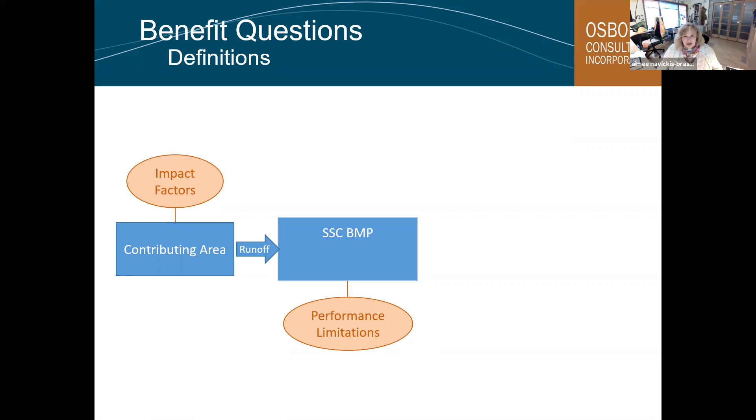With that, we also looked at performance limitations. We're really trying to understand the variables that can influence SSC performance with the impact factors and the performance limitations. Performance limitations are features of the SSC itself that can influence the performance, such as the type of BMP that's selected, the sizing criteria, the infiltration rate, and the media thickness, for example.

Another important variable was both the flow control and treatment mechanisms that the SSC provides. An example of a flow control mechanism would be some type of control structure regulating the discharge of flow from the BMP. Another example would be a treatment mechanism with sorptive capacity to help remove dissolved metals. So what are those mechanisms that can be expected with the SSC BMP?

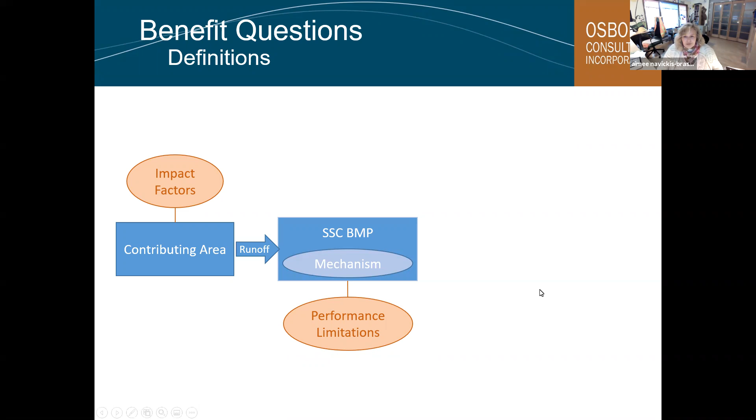Then we start looking at the benefits. We considered these variables that can influence the benefit. What are those benefits you might expect to see? The two we looked at that are stormwater related in the permit are the hydrology benefit and the water quality benefit, where the hydrology benefit related to the SSC is the effectiveness of the SSC for reducing flows.

The other thing we also looked at was other environmental benefits. These are not items that are in the permit, but some other benefit that the SSC could be providing that could improve conditions within the watershed area. Some examples of those would be groundwater recharge, and air quality improvement is another one.

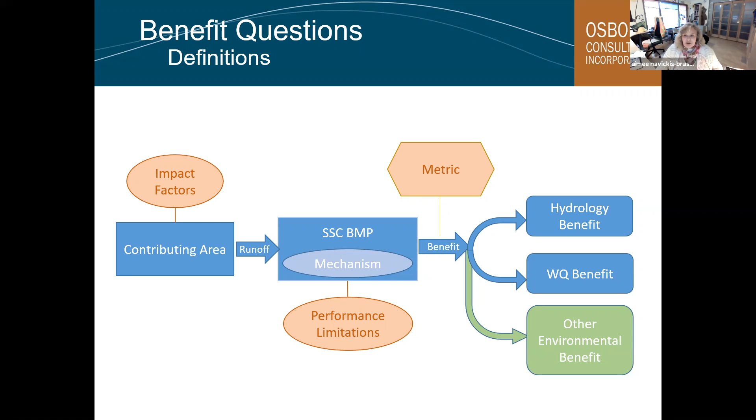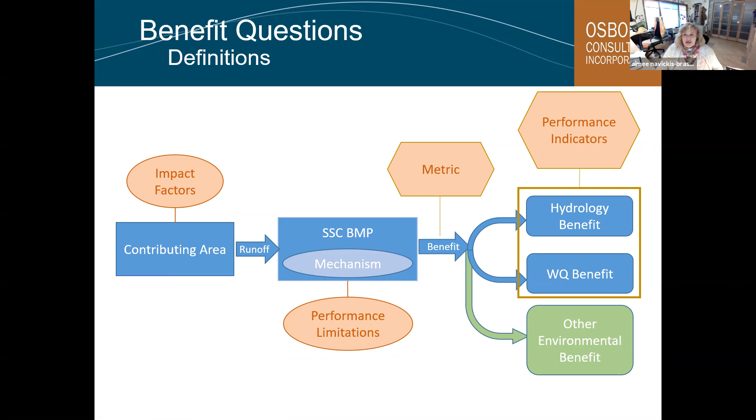And with that, we also were looking at the metrics. What are metrics that are used both in Washington state as well as nationally to measure this benefit? A percent reduction is an example of a metric that could be used. We also defined the performance indicators related to the SSC, focused on the hydrology benefit and the water quality benefit, and how effective the SSC is for reducing pollutants or whatever metric is selected. It's important to note that we define the point of measurement for the performance indicators as the discharge point of the SSC in general.

Our approach for doing this work included a lot of literature review. We reviewed the Phase I annual reports to understand what types of SSC projects have been done in the past. We wanted to make sure we were focusing our literature search on ones most relevant to the permittees, indicated by ones that are maybe used more commonly. We also had interviews with the permittees and asked them about ones they might anticipate using in the future to help us narrow that focus. We met with Ecology again to really go through and understand the permit, and the reasoning for the permit language currently.

We reviewed a lot of journal articles as well. Some were single studies where the whole paper was about one study, and some were a synthesis of many studies. We gave priority to peer-reviewed studies because those tend to have higher data quality. We also reviewed government reports and documents, which are reports on a government website or government agency's website. These are usually peer-reviewed as well, although it's not always as clear depending on where you find the document. We also pulled data from the International BMP database and NSQD to help with synthesizing all of this information.

Prior to starting the work, we defined an approach for the literature search. We wanted to have comparable data so that when we were going through this, we were comparing apples to apples. So we laid out a plan.

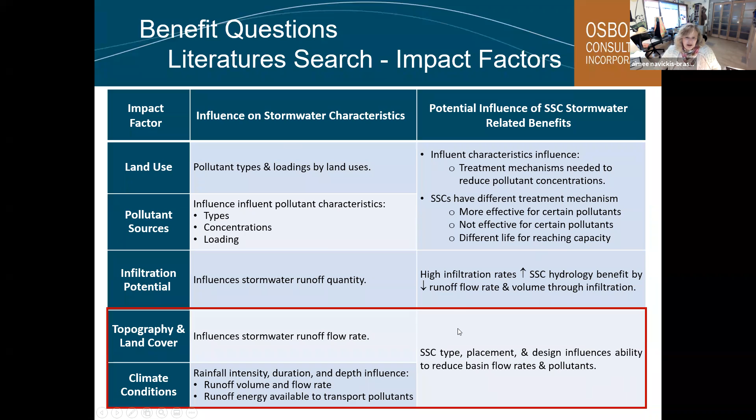So this can affect the SSC type, placement, and design, will influence the ability to reduce the basin flow rates and pollutants there. So this is just more of a qualitative consideration, especially as we start thinking about those application pieces for the SSCs.

Okay, so as part of our approach for the literature search, we looked at TAPE protocol. I want to explain why this is really important when we're thinking about comparing data between studies. So this is from the International BMP Database.

It's just looking at dissolved metal. On the y-axis, I have the frequency that a specific reduction occurred. 0% means there were no reductions in that category, and 100% means all of the data had that reduction. So you can see, looking at all data here, there's about 5% that actually had an increase in dissolved zinc coming out of the BMP.

Then you've got about 30% that had no change. You had about 15% that had less than 20% reduction. You had about 10% that had a reduction of 20 to 40%. And then about 10% that had 40 to 60%. And then about 20% that had 60 to 80% reduction. And then the last 15% was greater than 80%.

So these were all treatment BMPs that would fall in SSC type 2 for new treatment BMPs that we looked at. And we looked at all of them. We didn't filter anything out.

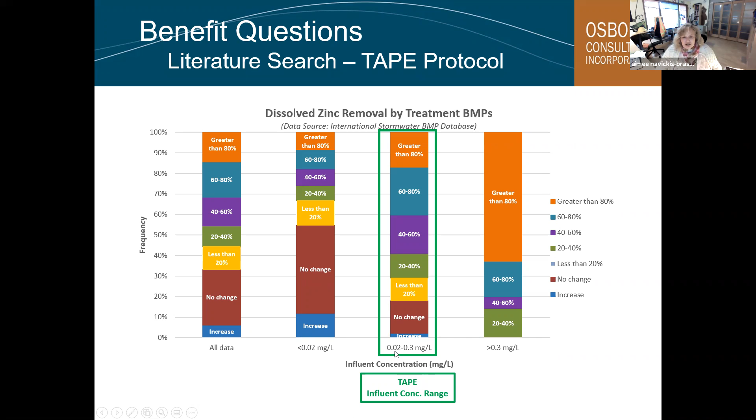Then what we did is we broke the data up and we looked at 3 different groupings. We looked at the TAPE influent concentration range first. TAPE defines the influent concentration from 0.02 to 0.3 milligrams per liter. It limits the influent concentration to that range. We also looked at concentrations that are higher than 0.3 to see how the pollutant reduction compared. And we also looked at studies where the influent concentration was less than TAPE.

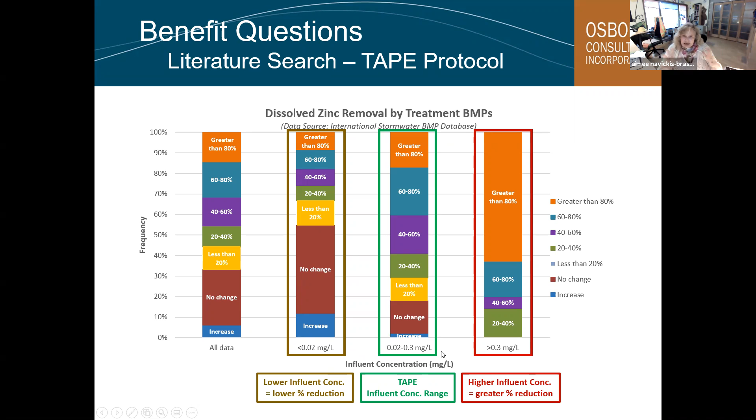So we were hoping to find studies that were done with influent concentrations closer to the TAPE range. That was very difficult to do. We ended up going into the International BMP Database and just limiting the studies down to focus more on the influent concentrations in that range.

2 studies done in New Hampshire looked at 2 different depths of media. It had a different media composition as well. They looked at the nitrates that were reduced, and they actually got a 44% reduction and a 43% reduction. They didn't report any leaching from these studies. These are very different results. These are also not comparable BMPs because it's a completely different media, completely different depth. I'm not surprised to see these differences here.

We know that the Washington media leaches nutrients. The other one appears not to. The different depths are also important. The deeper your media depth, typically, the more likely you'll see nitrogen cycling, which is often the dominant mechanism for reducing nitrates. So we also noted that some studies don't include leaching at all.

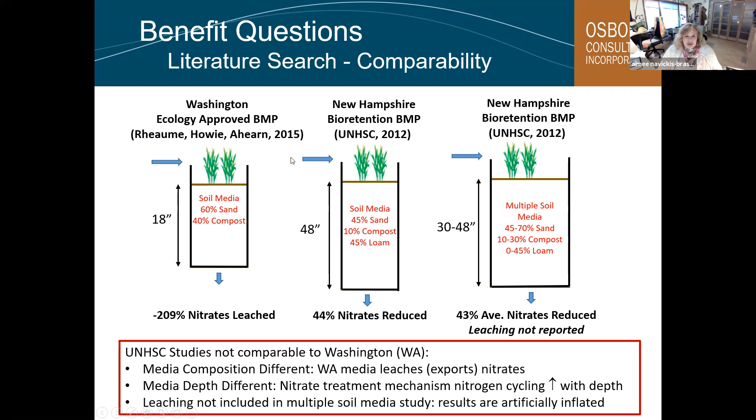They don't mention that. We do, in Washington, note when we see pollutant leaching out, but I did see some that were just not noting it. So when you don't include that data, it artificially raises the percent reduction. So anyway, these are the reasons we outlined having this consistent approach at the very beginning of the study, but the literature just didn't exist for us to be able to follow the plan and collect data for the study. So let me show you what we found in the study.

So in the first column here, I have the SSC project activity type, numbered all 11 of them. And then I have our different performance indicators. We have hydrology that we used, as well as water quality. Again, this is the effectiveness of the SSC for reducing flows or reducing pollutants. We looked at all of the targeted pollutants that are in the NPDES MS4 permit. We looked at the performance indicators for those for each SSC.

We also looked at the TMDLs listed in the Western Washington permits to see if there was data available to indicate how these SSCs would perform for those different parameters. NA means it just didn't apply to that study. For example, for new flow control facilities, we weren't looking for anything in the NPDES permit, because it's not approved to provide any reduction of a pollutant, so we didn't look for that. The same with new runoff treatment BMPs, not approved to provide flow control reductions, so we didn't have that either. We had a handful of items we didn't look up at all because they're not approved to be used for that.

At the very beginning of the study with the TAC, we talked about the SSCs also in the stormwater manuals, like flow control facilities, runoff treatment facilities, and LID, and decided that instead of going through the literature for performance of SSCs for regulated parameters, we would use the performance standard for runoff treatment and flow control that's in the manual. So those are the parameters and data we used for that.

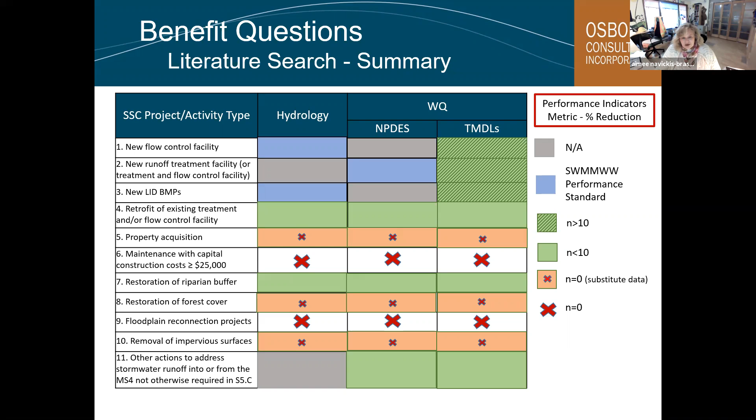We also had cases where we couldn't find information, but used substitute data. A good example is property acquisition and removal of impervious surfaces - we used data from open spaces and compared that to what we presume the property would be if it wasn't acquired, or not developed, or the impervious surface was not removed. And then there was just no data at all, like maintenance with capital construction costs greater than $25,000, or floodplain reconnection projects. There's some good data on floodplain reconnection, but it's mostly modeling work, not done with samples, and not measured at the discharge point of the SSC itself - it's measured in the water body.

After we got through all that information in the literature search, we developed matrices. I'll show you at the very end. It evolved as we went through the study.

Any data we collected, we synthesized using basic statistics. For some studies, especially the International BMP database, I went through and tried to limit it down to the parameters as close as I could, so it'd be more representative of what we'd see in Washington. We recorded the performance indicators - the metric we used was percent reduction. We also recorded when it was leaching, so in the table, if you see negative values, that's because that parameter was leaching from that SSC. We noticed a pretty wide range of data, because within the SSC categories, like new runoff treatment BMP, that includes many BMPs, not just one in particular, and when you start averaging it, you get interesting ranges of information. So we reported averages, minimum, and max values to show some of the differences in the data and sample size. I'll show you that at the very end.

We also documented environmental benefits if they were included in the study we were reviewing, and identified data gaps - there were a lot of them. So we identified the status of the research as it is now.

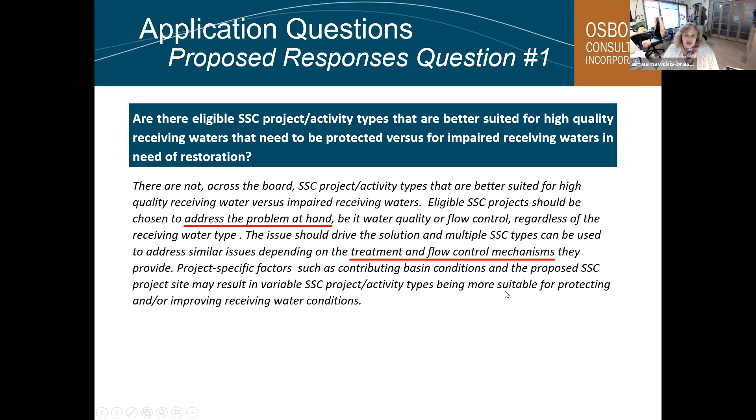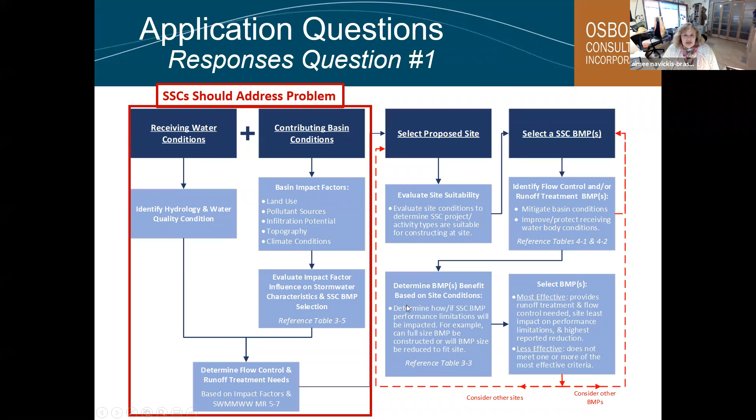So going back to our flow chart and looking at the left side, the SSC should address the problem. So those are the receiving water conditions or impairments, and the contributing basin conditions, those impact factors that can influence the SSC performance. And the other part is making sure that the SSC that's picked provides the mechanisms that are needed to address the problem at hand. That's getting to the core of that answer.

So for response to question 1A: within an SSC project activity type, are there more or less effective BMPs or combinations of BMPs for various land uses and receiving waters? Our response for that was there are typically multiple BMPs that fall within each SSC project activity type.

BMPs that are more or less effective is dependent on many variables, such as the contributing basin impact factors, the specific receiving water impairments identified for improvement, whether the selected BMP provides the type of hydrology, flow control mechanism, and or water quality treatment mechanism benefit needed, the project site suitability for locating the BMP, and other factors itself.

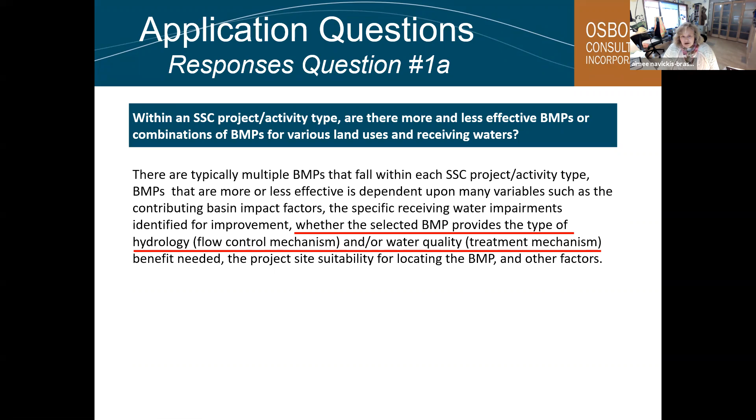So really highlighting in this one, the part that's important when we're talking about more or less effective, it's really going to be influenced by whether the selected BMP provides the flow control or water quality mechanism that's needed to target those parameters. And also the concept that not all BMPs or SSCs are created equally. They all have different functions.

So this is a table of more structural BMPs that fall into category or type 1, 2, and 3, which is new flow control, new runoff treatment, and LID BMPs themselves. On the far left, we just have the BMP categories, and the BMPs are broken up by that. We have the BMP name itself broken out from the SSC category. Then we note the different flow control and treatment mechanisms that are provided.

And you can see for flow control, some of them provide flow control, some don't. Some of them provide basic treatment, a couple don't. Some provide enhanced treatment or dissolved metals. Some provide both TSS, dissolved metals, and total phosphorus reduction. Not a lot provide oil. So they're all different. And a key part of that is when we're talking about more or less effective, a big part of that is understanding the problem at hand and making sure the SSC BMP that you pick matches.

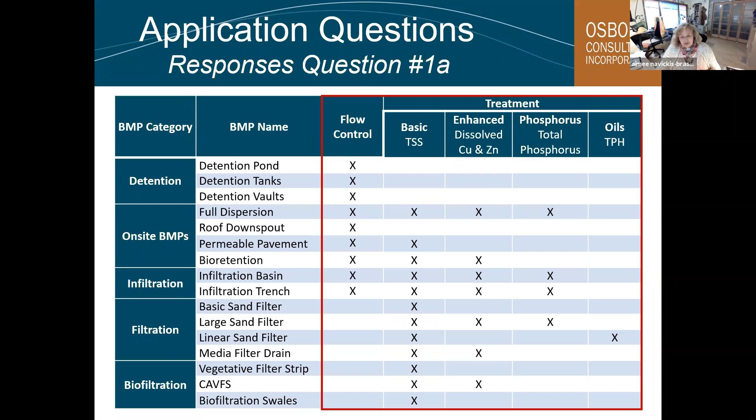Okay, so a longer question: what is the threshold below which implementation of a given SSC project activity type might not make a difference? So there are no readily definable thresholds below which implementation of a given SSC project activity type might not make a difference, based on the literature reviewed. There are probable thresholds of actions below which there would not be measurable or observable changes in downstream receiving waters.

So there are actions you would take, especially at the beginning of your retrofit process when not much has been retrofitted and many areas are unmanaged or inadequate—you won't see as much change there. But if you think about your retrofit in terms of the whole watershed area and reaching an ultimate goal, any action that removes pollutants or reduces flows, on any scale, will make a difference when combined with other related actions, even if it's not measurable in a stream using available methods.

So you may have a very large project going and not see a big difference when you try to measure it, but you have to think about the cumulative effects of the project, as well as the impacts from unmitigated projects in a watershed that resulted in cumulative degradation from multiple projects—effects that may not be related to any single action.

So you have to think about how you got where you're at, and also think forward to watershed improvements resulting from one or more incremental retrofits or restoration projects under a single plan. Therefore, the threshold size is related to the cumulative benefits of the total plan that can be anticipated to achieve an expected outcome. Existing watershed conditions can also influence that threshold.

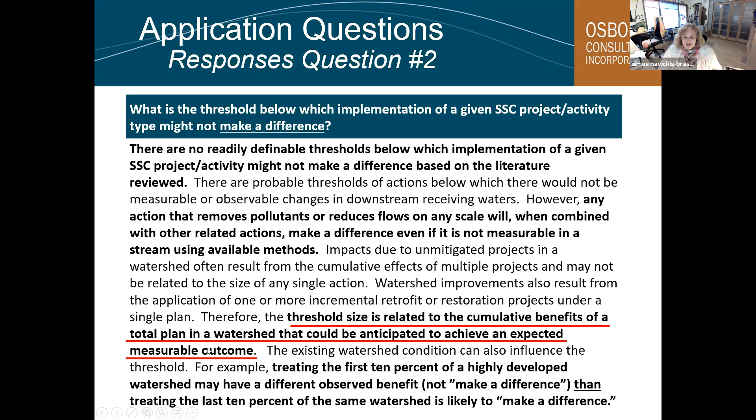So a couple of key points we'll highlight back on the flow chart relate to the threshold size, being related to the cumulative benefits of the total plan in the watershed that could be anticipated to achieve an expected measurable outcome. I'll combine these two, and then we go to the graph.

Okay. I can't, when you have these Zoom calls, I only have so many screens, so I can't see everything anymore.

So for question 2A, another question we were addressing, very much related to the last one, is how many are needed to achieve a benefit, and at what scale is modeling necessary to quantify benefits? There is no standard answer to how many are needed to achieve a benefit at a given scale.

As described in the response to the last question, watershed improvements can result from the application of one or more incremental retrofit or restoration projects under a single plan, or can occur over many years before being fully implemented. Also, the existing contributing basin size or condition may influence the threshold.

So a useful metric that could be used is the percent of progress made toward the watershed goal. If you're thinking about your watershed improvements as one big area, maybe the easier way is just percent progress towards your complete goal.

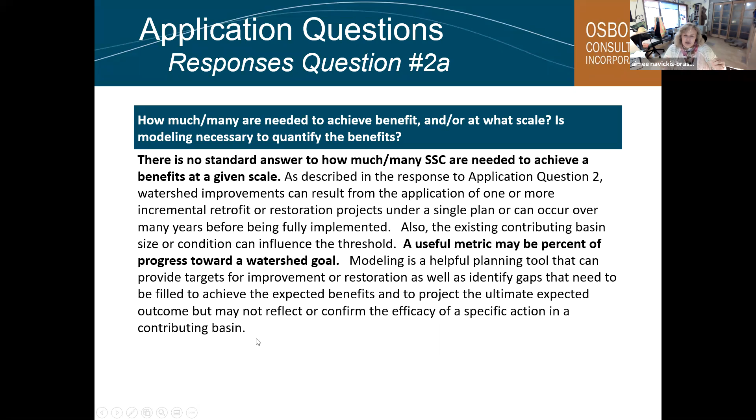So modeling, in response to the question about whether modeling is necessary—modeling is a helpful planning tool that can be used to target improvements or restoration, as well as identify gaps that need to be filled to achieve the expected benefits and project the ultimate expected outcome, but it may not reflect or confirm the efficacy of a specific action at contributing basins. This last part addresses the fact that as you begin this progress, you may not see that benefit because it usually takes many more projects and those cumulative impacts.

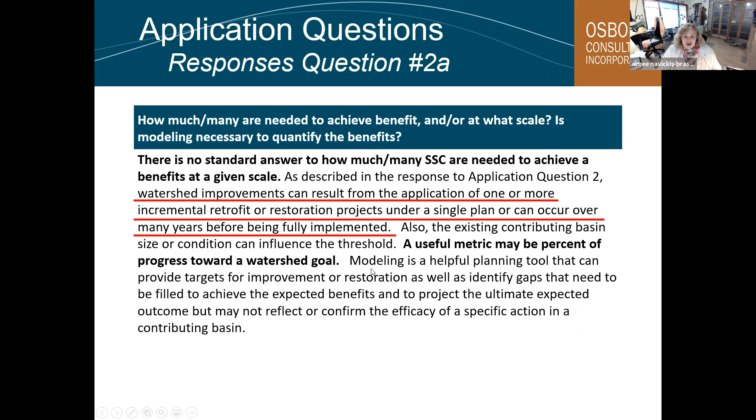So highlighting that watershed improvements can result from the application of one or more incremental retrofit or restoration projects under a single plan, over many years. Going back to our flow chart, thinking about those variables that can influence the benefit for the SSCs and influence the application—really for this one, it's thinking about the whole watershed, those cumulative actions done over many, many projects.

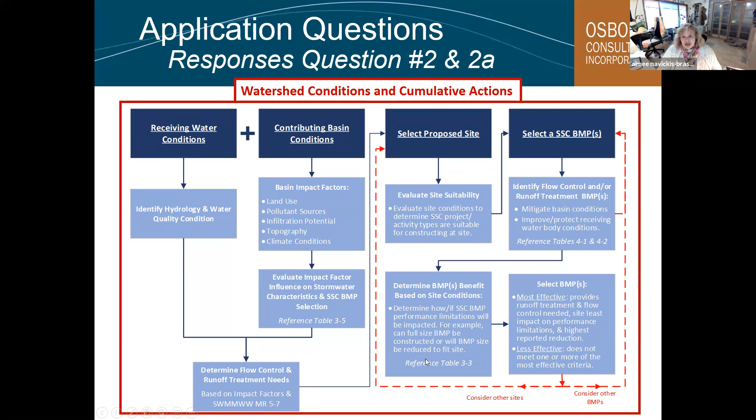Okay, two more. And then we go to the matrices.

So this is response to question 2B: how can the metric be scaled for retrofit projects that, due to project constraints, are not able to fully achieve the defined stormwater related environmental benefit?

In the literature reviewed, we did not find research that provided any basis to quantify a partial BMP or a partial SSC project activity type—meaning an SSC that doesn't meet the full design criteria to provide the full benefits, so it's been reduced from that full criteria.

However, there are common practices to scale metrics that are used. A lot of them assume a linear relationship between the portion of the SSC that meets the criteria and the portion of the benefit. A good example is the equivalent area determination. So if you've applied for a water quality grant, you've probably gone through that calculation before, or received a water quality grant for a retrofit project.

There's guidance in the Appendix 12 of the permit for Phase I for SSC 1 through 4. They use the equivalent area to measure benefit. It provides some type of framework to account for that partial benefit achieved by the SSC.

So there's nothing out there, so we made suggestions for how to move forward. The equivalent area approach could be expanded to scale other SSC metrics, such as infiltration for flow control projects, pollutant loading for water quality projects, or normalized cost for any project. For SSC types such as property acquisition, restoration of riparian buffer, forest cover, or removal of impervious surfaces, modeling is commonly used to estimate flow control benefits. Specifically, in relation to the metrics, the results from that could be used to scale the metric by determining the portion of the post-implemented SSC flow rates to the same SSC size to meet the full flow control standard from the Stormwater Management Manual for Western Washington.

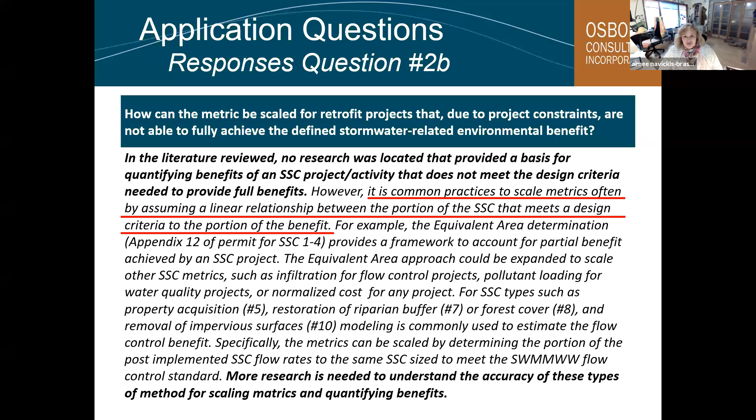Okay, so when we're thinking about scaling benefits in the scheme of these variables that influence the application, down here with the scaled metric, this partial benefit concept is on here to determine that benefit of the SSC, and it specifically talks about that partial BMP size and estimating what that benefit is based on sizing and if there's any other influence that could limit the SSC's performance. Understanding that information will help you understand the effectiveness of the SSC and be able to compare what's more or less effective between the SSCs.

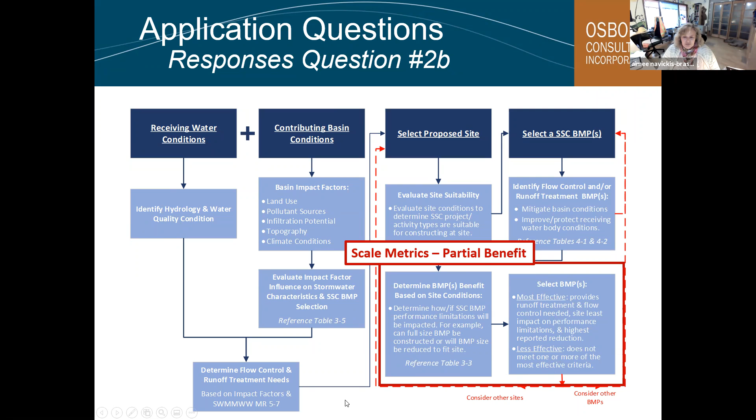Okay, last one. So what are other limitations, considerations for the most beneficial application of specific SSC project activity types for various locations, land cover, land use, and receiving waters? So based on the gaps in the literature reviewed and the number of project-specific variables that we've been looking at on the flowchart that influence the benefit of the SSC project activity type, it is not possible to determine the most beneficial application of specific SSCs.

However, the literature does provide information that helps us qualitatively understand it, and we know which conditions can influence it. We can use that information as a guide to focus more on what's a more beneficial SSC project activity type when you're comparing it to other SSC projects, considering the unique project conditions as well.

So as we talked about, noted previously on the table I showed you, SSC BMPs have different treatment and flow control functions, and they're not all the same. They're not going to provide the same benefit. So really, coming to an overview conclusion, the more beneficial SSC BMPs provide the flow control and runoff treatment function needed based on the receiving water and contributing basin conditions, those impact factors, and have proposed site conditions that are suitable for constructing the BMP without reducing the SSC stormwater related benefit.

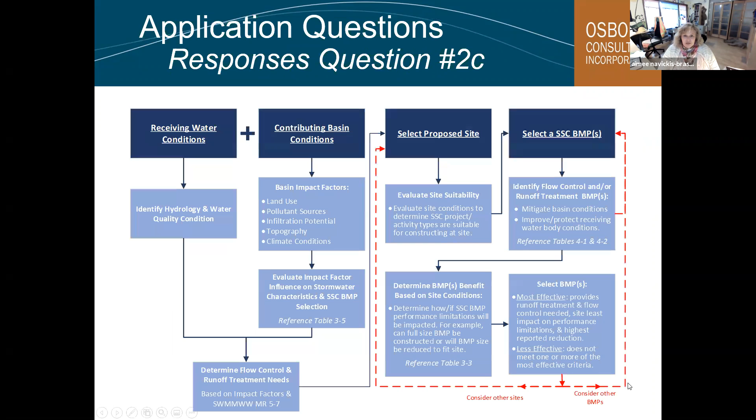And looking at where this all fits on the graph, it's really important to consider those unique project conditions in the receiving water contributing basin, the proposed site conditions, as well as the SSC, to really help understand which one's more beneficial. Going through the whole process, the last box you get to is to figure out which one is more or less beneficial or effective. And then there's also, if nothing works, going back through and starting over with your site selection or BMP.

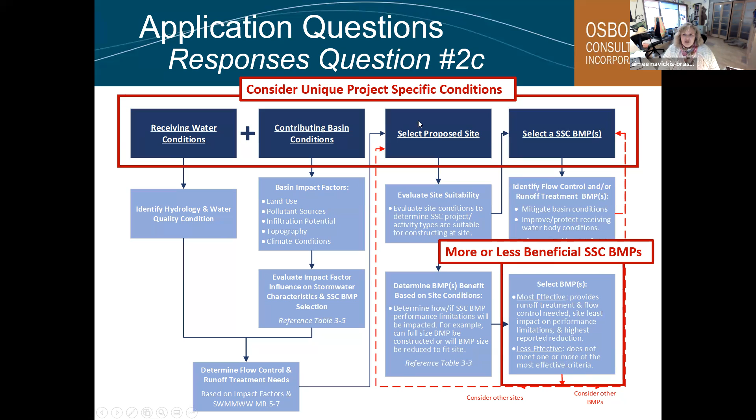So, okay. Can you see it?

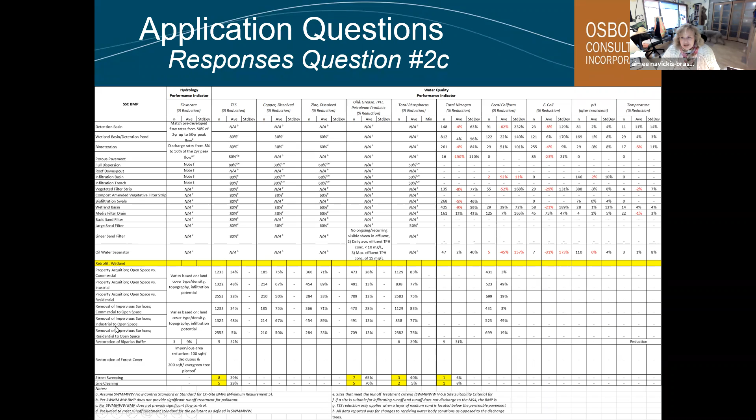So we wanted one table that we could summarize all the data that we had collected here, and I am going to blow these up in just a second. So we did go through, I broke them out of the SSC groups and really started looking at them more as individual BMPs or SSC BMPs instead of a group. Let's look at it a little bit closer in the upper corner. What we have, down the column, is the SSC BMPs, all the different ones that we found in the literature summarized there.

Then we have the hydrology performance indicator, as well as the water quality performance indicators. The ones I've shown here are just for parameters that are in the NPDES permit, such as TSS, dissolved copper, dissolved zinc, total petroleum hydrocarbons, and total phosphorus reduction.

For each we've summarized the N. We have that not on this one, it shows up on another one, believe me. The average performance indicator for this one was percent reduction, and here we do have the standard deviation.

I think I talked about the min and max earlier, on the matrices we developed for chapter 3. So just looking at bioretention and porous pavement, what we have for the hydrology performance indicator is noted straight out of the Stormwater Management Manual for Western Washington, what they're approved for related to flow control. Then looking at the treatment performance indicators that are defined in the manual as well, that's what we used for any BMP that was in the Stormwater Manual. There are lots of footnotes that go with this table because there are lots of variables that can influence it.

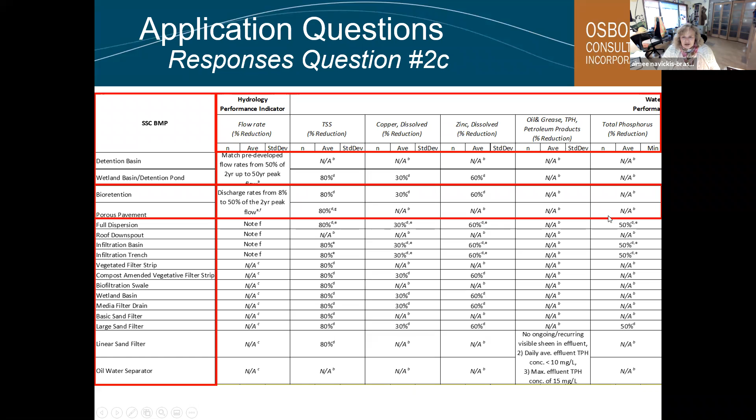Such as TSS reduction with porous pavement - you have to have the medium grade sand underneath it in order to get that 80%. So there are lots of little notes that go with these.

So then I've switched over to, I've left the column the same on the SSC BMP type, and now I'm just looking at the TMDL parameters. These are all the ones that popped up in the permit for what permits Western Washington. So we go into total nitrogen, fecal coliform, E. coli, pH, temperature, and look at the different sample size. You can go through and see the average reduction.

If it's red and negative, it was leaching based on the results we had, and the standard deviation. There's quite a spread in the study results for a lot of these. We did go through and pull outliers, trying to get data that we had to be closer to what was intended, so we could have more comparable data and reduce some of the things that may not be as comparable.

What we didn't do is use some of the BMPs that are listed here - they're Washington BMPs, but there are BMPs from North Carolina or Minnesota or wherever uploaded on the International BMP database, and they may have different design criteria and perform a little differently than ours. There wasn't enough information on specific Washington BMPs to pull that together, so it was just limited to Washington.

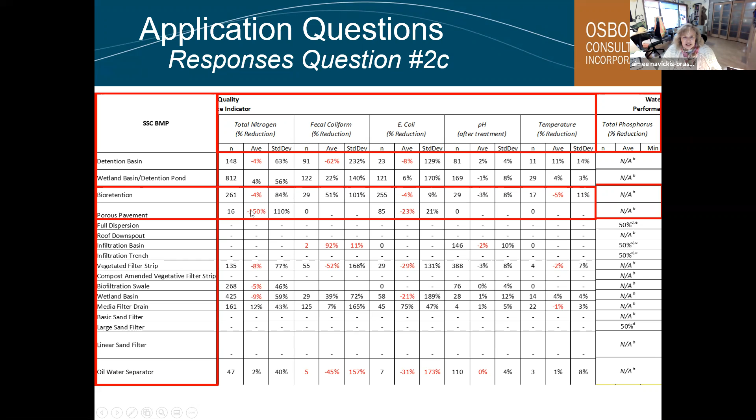Oh, here we go, okay. So the first one, again, I walked you through that without pulling the bar up, and then highlighting bioretention and porous pavement. They both fall under that new LID BMP, I think it's a SSC type 3, just highlighting the different performance between them and the data we collected.

So we couldn't find any data just on property acquisition. We couldn't find any data on restoration of forest cover because apparently nobody's monitoring runoff from forested areas. So in order to have some comparison with those, we found the next closest thing. Specifically for property acquisition, we found data for open spaces and compared that to presumed commercial development - if it wasn't left undeveloped and it went commercial, what would we expect to see based on that data? We did a comparison between the two.

Same with industrial - we compared industrial land use and runoff from that to open spaces, and so forth with residential. We have quite a bit more data here, I think that was from an SPU study that we were able to pull this from, and develop a good comparison to see what those benefits might be for this particular BMP.

We do have quite a few that we weren't able to get data from. Restoration of forest cover, we really couldn't get good water quality data, and it was noted in the literature that there's not a lot out there.